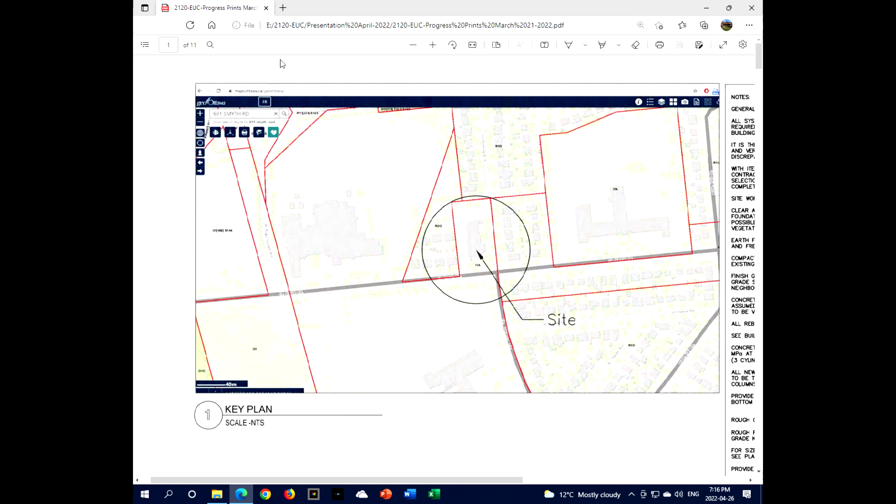I'm not quite sure how. I guess what we'll do is we'll call up a couple of the drawings that I have, and I may jump around in terms of what's on the drawings. Most of the discussion tonight will be regarding the front area. So Russell, if you could bring up, I have a drawing here as well. Let's go to the next, I'll give you a drawing number. If we go to A03, so it'll be the next one after that, I believe. Yeah.

I won't stay very long on this particular drawing. This is a drawing that indicates the demolition in terms of what we're removing. So as you can see, the dotted lines will indicate the doors going into the sanctuary, coming down a little lower, the vestibule doors that you have. We've identified we're going to be taking up temporarily all the pavers out front. They're going to need to do some excavation for those columns. So they'll want to take them out, store them, and then put them back in.

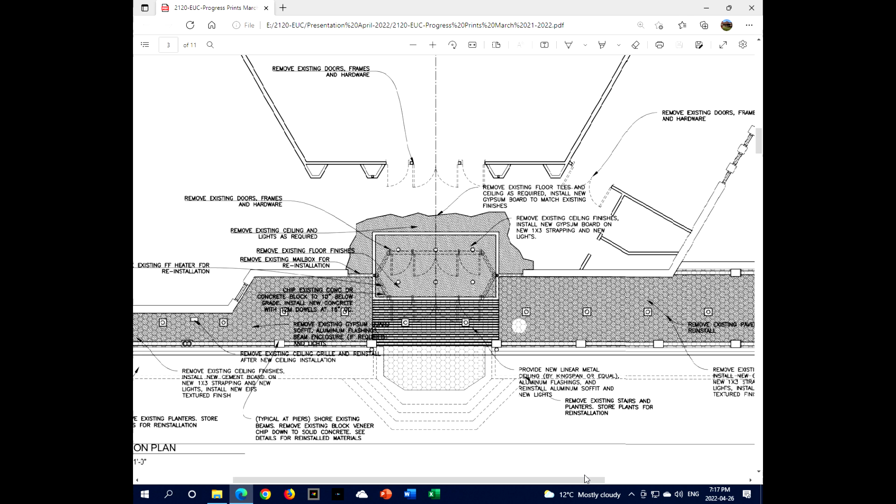And of course, as you can see, the planters will come out and the front stairs. On the left-hand side of that drawing, there will be a new planter reinstated. It'll be out of concrete as well. And then on the right-hand side, you'll see on the next drawing, that will become a barrier-free ramp that will go down to the parking area. So if you want to go to the next drawing. Oh yeah, and as you can see, I've called up what would be removed going outside these doors here.

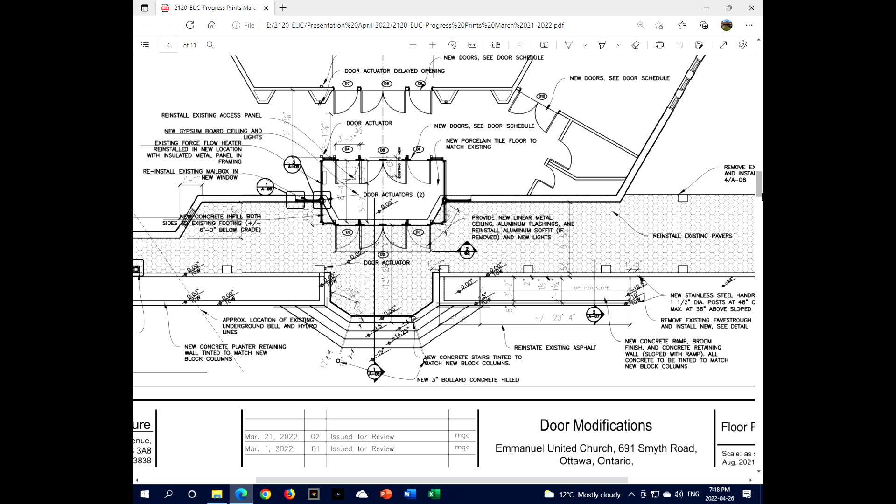So now you'll see all the dotted lines are now solid lines. That's what they're going to be providing or installing as new. The vestibule, you'll notice it is creeping in, and we were just talking about it a little earlier. The interior set of doors are going to have to come in about 24 inches. The reason for that is if you look on the left-hand side of the vestibule, you'll see a dimension there,

the 8'-0". The reason for that is by code, when you have barrier-free doors, when the interior door opens up, you need a minimum dimension in front of that door before you get to the next door. And that is why, in the scenario you have right now, you've got a barrier-free door on the left-hand side on the inside, and a barrier-free door on the right side. You have to do this sort of zigzag going out.

Again, primarily for code reasons, you can see I've squared off the exterior walls there. They're not at a 45-degree angle anymore. The whole vestibule will be a rectangle. You can see the barrier-free ramp on the right-hand side, which will go down to the parking lot area. They'll be reinstating the pavers, putting everything back together.

All the columns will be, a little later on, I won't stay on the drawings too long, but we have details of how they're going to construct the new columns, which will be reinforced concrete block columns.

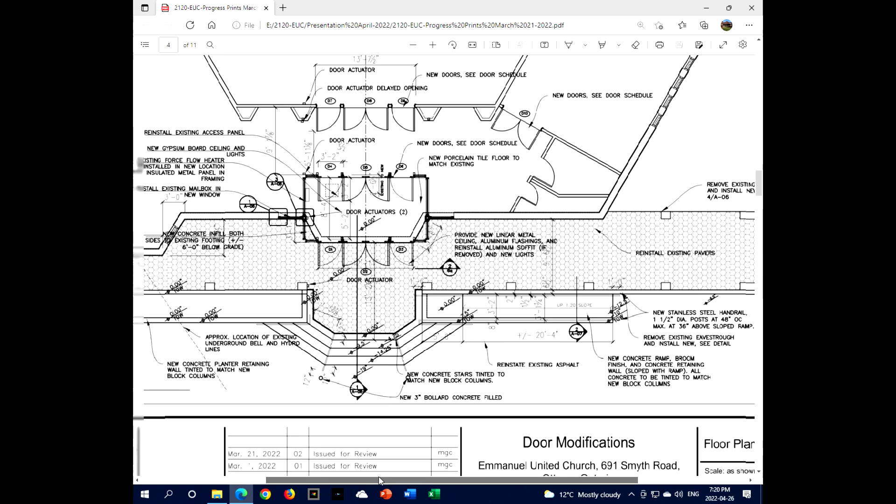If you want to, Russell, if you just want to scroll that drawing up so we can take a look at that area there. I do have, and I'll quickly go through, I do have PDFs and also have hard copies of some of the product data. I have a couple pretty pictures of the actual pavers that I'm proposing in that area. We'll get to that at the end.

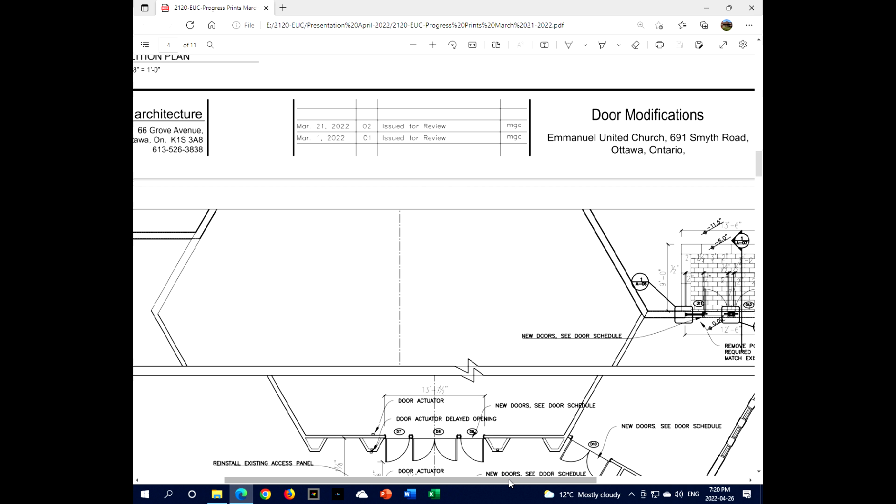But basically, as you can see, it's just a level platform. The grade will come right up to the platform, just clean things off in that area.

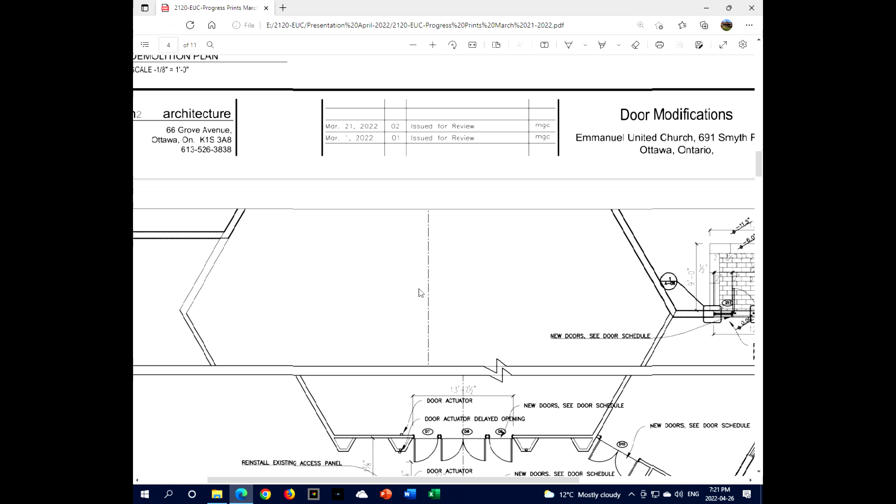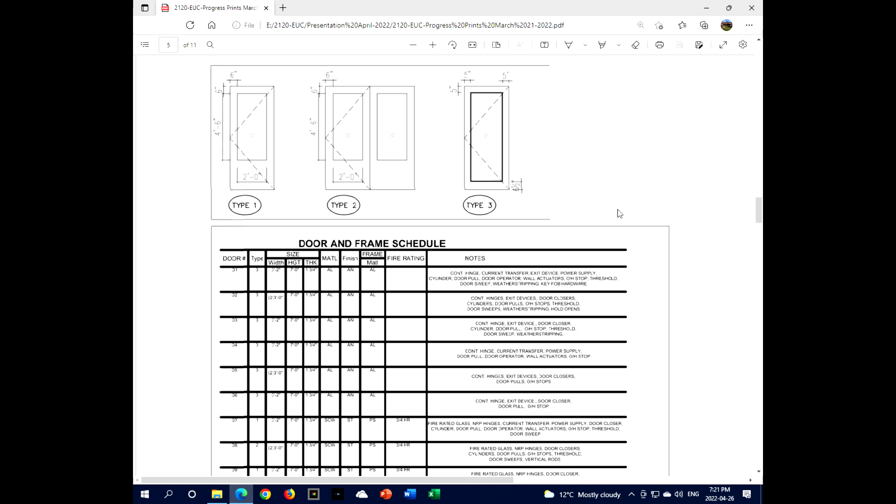Maybe, Russell, if you want to go to the next drawing, and at the top left-hand side, just a couple of pretty pictures. The below part, the door and frame schedule, gets a little technical. It basically talks about the type of hardware that is going to be required. We do have a hardware consultant that's actually going to take that information and put it into the specifications.

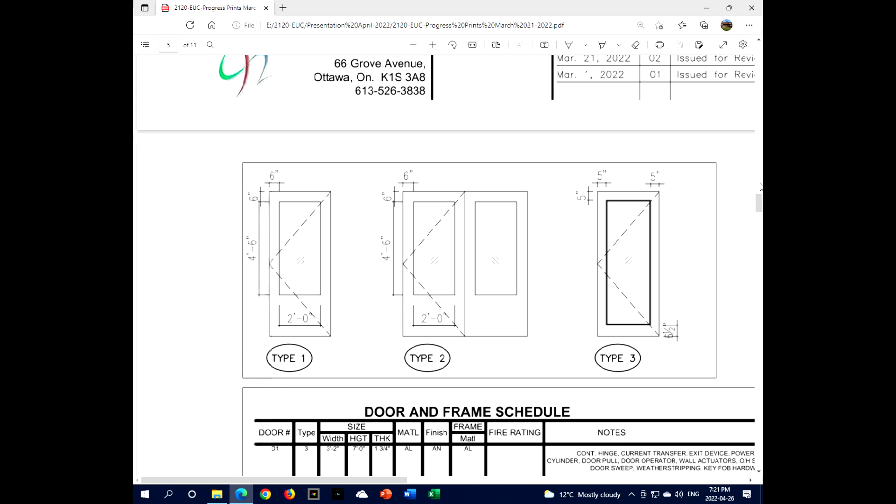On that note, I guess I'll touch on it now. In terms of finishes, we've got a lot of decisions to make on the finish of the doors. The wood doors, I've specified an oak door, which is what you have right now, color to match as much as we can. So the contractor would submit samples and we'd look at it and say, that's close or it's not close.

You'll notice there is a folder there with a bunch of little metal samples. If you look at the one, I think I slid it out a little. It's what we call a 613 finish. It's an antique oil bronze finish. If you look at it, it looks like what you have here.

What is interesting, the actual handle sample, and it all depends on the manufacturer and the process that they use. The actual door handle that I have there is a 613 finish. Doesn't look the same. That's what we used on the Southminster Church renovation.

So it's going to be one of those things where we will specify what we want, but we're going to have to get samples in and make sure, because depending on the manufacturer, they use a different process. That handle there, if you look at it in certain lights, you'd swear it was black. But when you actually have it on a door that's been stained, it is a brown, but it's more of a chocolate brown than the oil bronze.

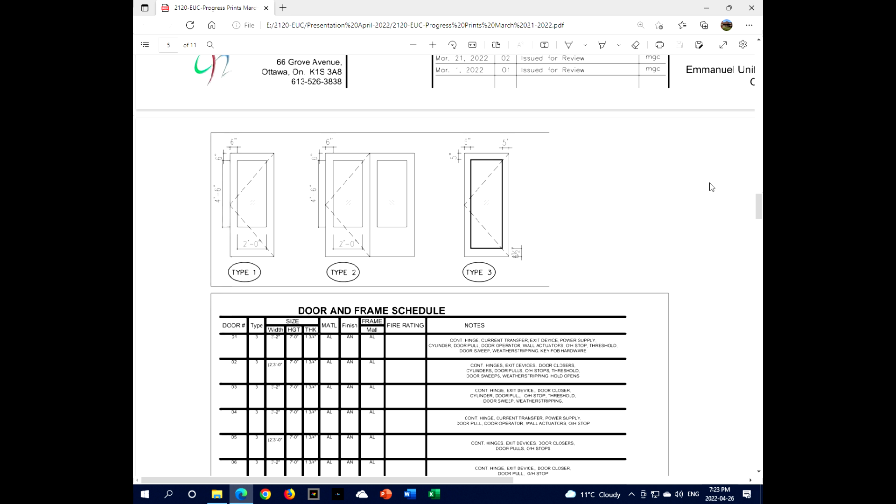Just a quick note so you can visualize what you're going to see. The door type 3, which is the one on the right-hand side, that is basically the vestibule doors that you're going to have. Now you will have, and I do have another catalog cut, I'll go through real quickly on that, a horizontal bar going across. It'll be what we call a panic bar or exit device that goes across.

On the other two doors, type 1 and type 2, those are the wood doors coming into the sanctuary and into the lounge. I spent a lot of time, I made phone calls trying to find a full light glass for you. Problem is these are hour and a half rated doors, and we can get an hour and a half rated door, but there's a limit as to how much glass you can have.

And actually, this is a fire rated ceramic glass, not Georgian wired, so you won't see those little wires in there. But everyone I spoke to so far, that's the maximum. They say so many square inches of glass that you're allowed in there. So it doesn't go right down to the floor, but part of the discussions were, let's open it up, let's try and make it more inviting.

And that's why you see the glazing that you have right now. Now that fire rated glass is available, we can go with a larger piece of glass. 30 years ago, all you could use was Georgian wired glass, and again, they had limits on how much glass you can put based on the fire rating of the door.

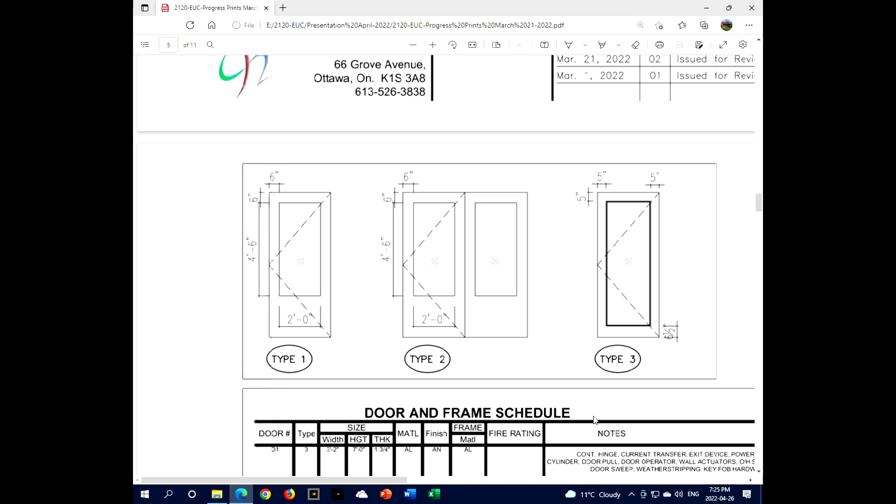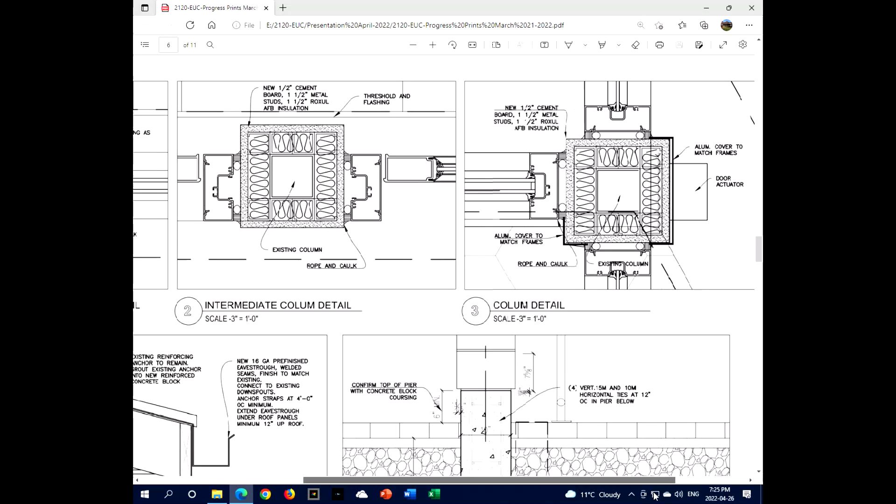Russell, if you just want to scroll to the other drawings, I don't think there's much to necessarily talk about, but as you can see, we've got details on how all the components are going to fit together. Bill had mentioned that you had some issues with your eaves trough over the breezeway, so we've got a detail in there. That detail actually pretty much came from the original drawings that you gave me.

And then if you want to just scroll to the right there. Again, I won't go into the details, but that's essentially the details on how we're going to repair those columns. I think maybe you can scroll to the next drawing, A7.

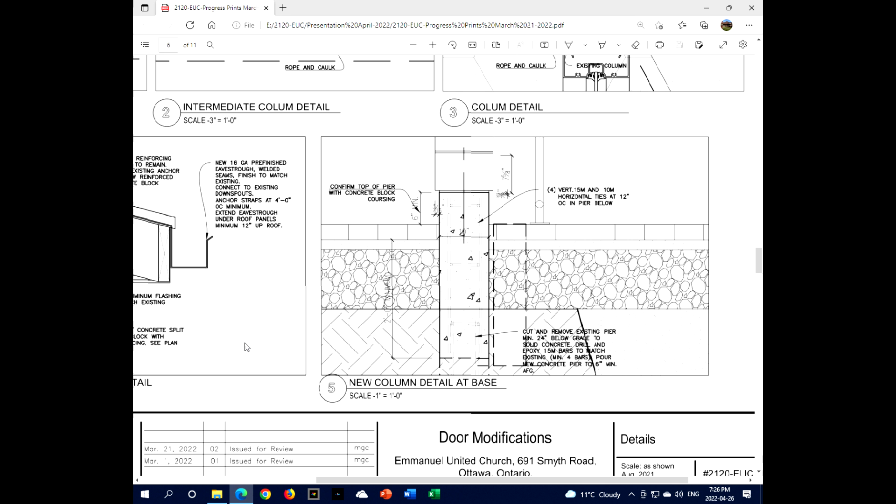And on the left-hand side, that's the section through those doors going outside. And again, I can show you quickly some pretty pictures. So you've got some pavers, you've got a mega block edging around it, and then the grass will come up to it.

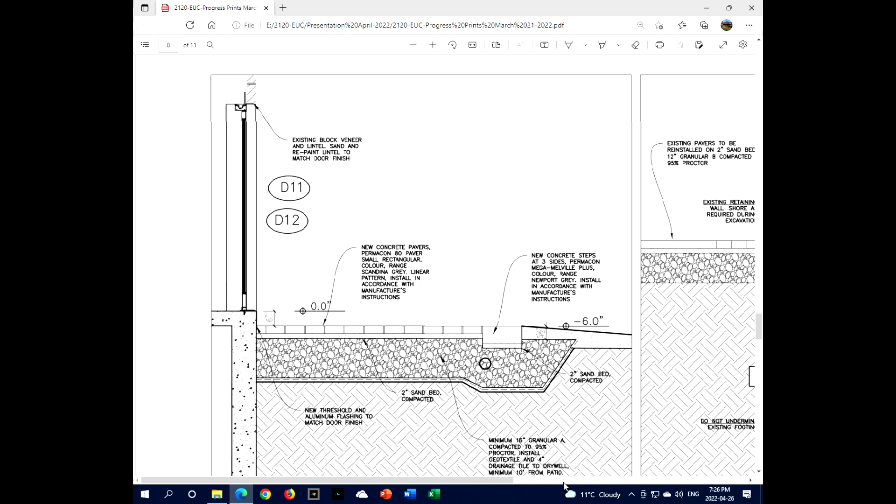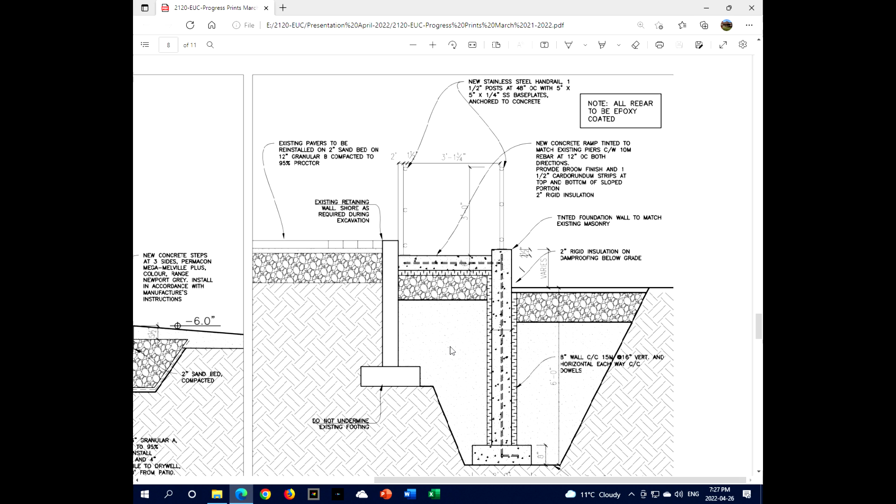And then on the right-hand side, I believe that's a section through your barrier-free ramp that's going down to the... and I think, Russell, maybe the only other one, maybe A09, which is not the next one, but the one after that. That's just a very quick elevation of what things would look like from the parking lot. I didn't get into rendering or coloring or anything like that, but I thought you might appreciate being able to see what it's going to look like.

Are those foundations under the pillars existing now? Yes, they are. There is a little discrepancy on the original drawings. Some of them showed concrete, some of them showed concrete block. What we've called for is to chip down a minimum of 2 feet or to solid material, dowel, and then form from there. We're trying to minimize the amount of excavation under this area.

There's not a lot of information on what is under the concrete that's at the outside of your pavers, just at the edge of the paver. You've got the pavers, you've got concrete, then you've got your planter and a wood planter. We don't know how deep that goes there. So we're going to try and minimize; we don't want to undermine what's there right now. Like any project, once you get out of the ground, you breathe a sigh of relief, because it's the unknowns that you deal with.

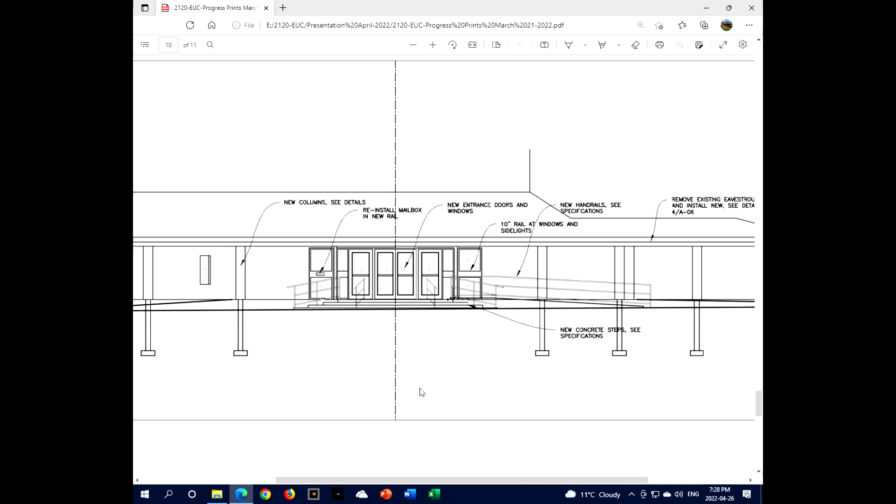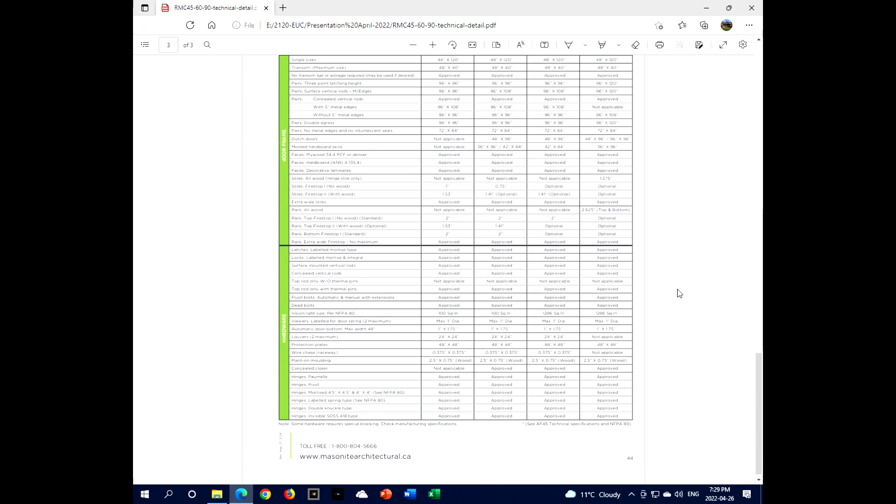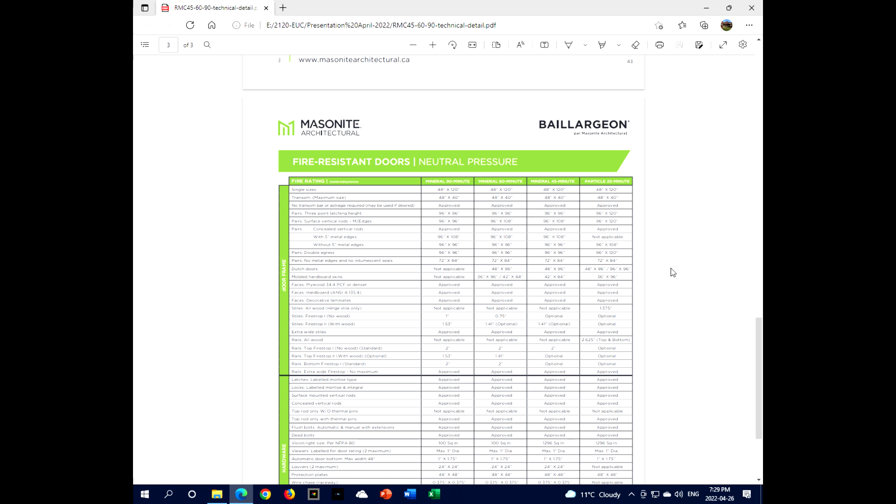Perhaps, Russell, if you want to go back to that file, there's one called, I think it's RMC. We'll just go through those files. Not a lot of information here for you, but they do make 45-minute, 60-minute, 90-minute doors, and then of course the glass. I spoke to them and specified the type of glass and how much glass we can get for your wood doors. So we could go to the next one, Russell. You can just close that file. A lot of that information will be in the specifications that I produce. So close that file and open up one of the other PDFs; we'll just jump around a bit.

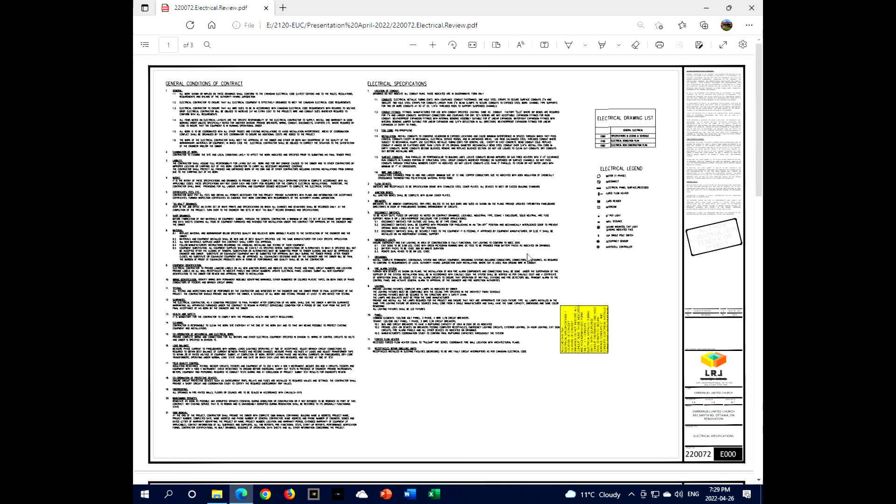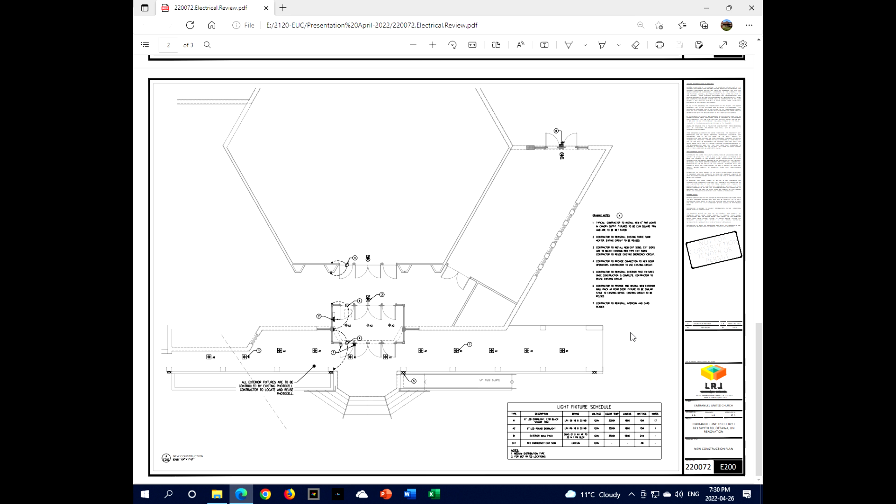I'll quickly go through that. Go to the third drawing. This is on the table. I brought 5 sets; I can print more if you need. There's the architecturals, and then there's electrical drawings. Not a lot of electrical work, but we're obviously going to be replacing the lights in the breezeway. There's 4 lights, they only showed 2, I've already told them, on the outside of the columns that they'll be temporarily removing and then reinstalling.

Everything out there will be reinstalled on your photocell, so they'll come on automatically. We have pot lights inside the vestibule, and the exit lights we're hoping to reinstall. Again, not an awful lot of electrical work on this project. Most of the electrical, which will be picked up as a typical detail, will be all the controls for your doors. You have a doorbell, an intercom system, a key fob system, and you're going to have an actuator, which is handicap buttons. All that has to be tied in, so there'll be a lot of wiring at the doors, but we'll pick all that up.

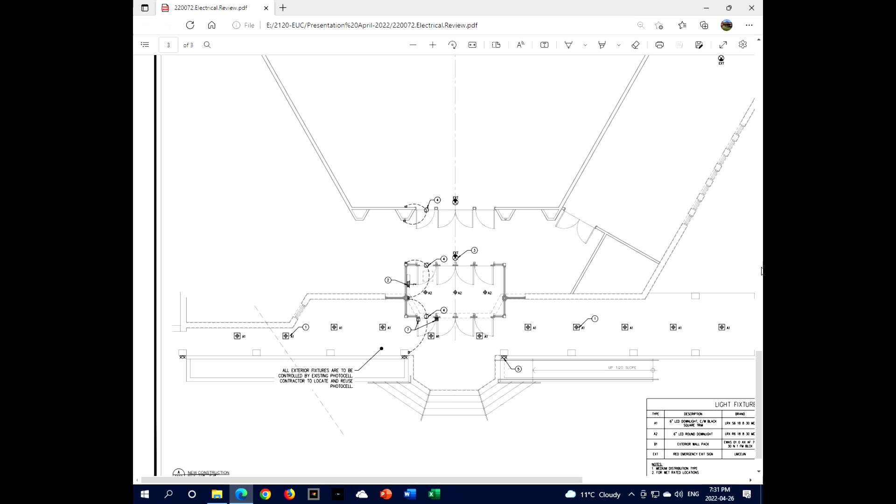So close that PDF and open another one, scroll down to page 6, I believe. You'll see a red bubble. This is your Kawneer aluminum storefront doors. It comes in 3 different stiles: the 190 narrow, 350 medium, and 500 wide. I've specified the 500 wide, which is pretty much what you have out there. It's also a maintenance issue; your doors are a lot stiffer with the wider stiles. But if there's feedback and somebody wants to slim those doors down a bit, we can always change the specification.

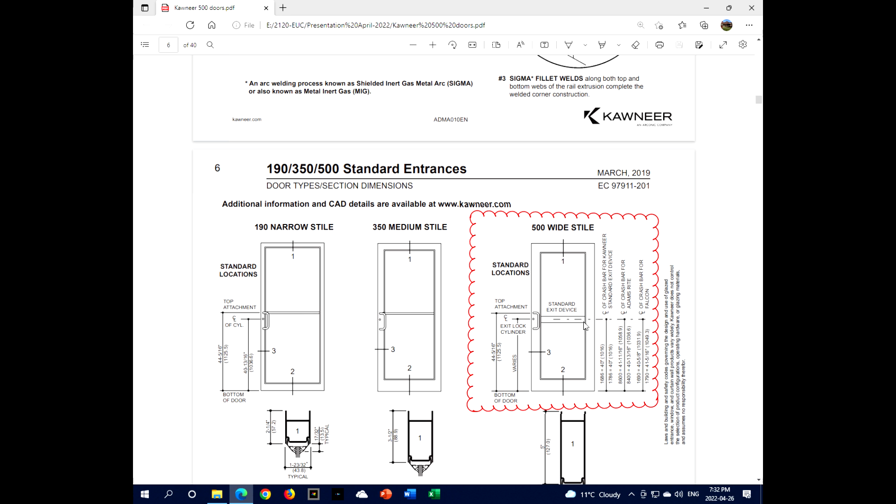And as you see, there will be the impression of a horizontal rail. That elevation shows an exit device. So close that file and open another; you don't have to open the 500T because it's the same.

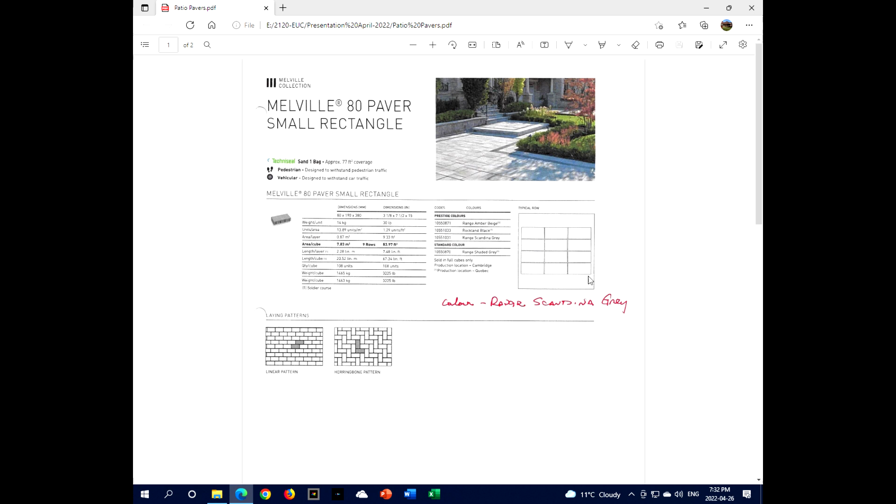The difference between a 500 and a 500T is basically the outer doors are thermally broken. They've got a little gasket to help with your... These are, again, I'm totally open for suggestions if somebody comes up with another product. This is one of those things where in order to show some pretty pictures, I Googled, right? And just to give you an image of what you're looking at.

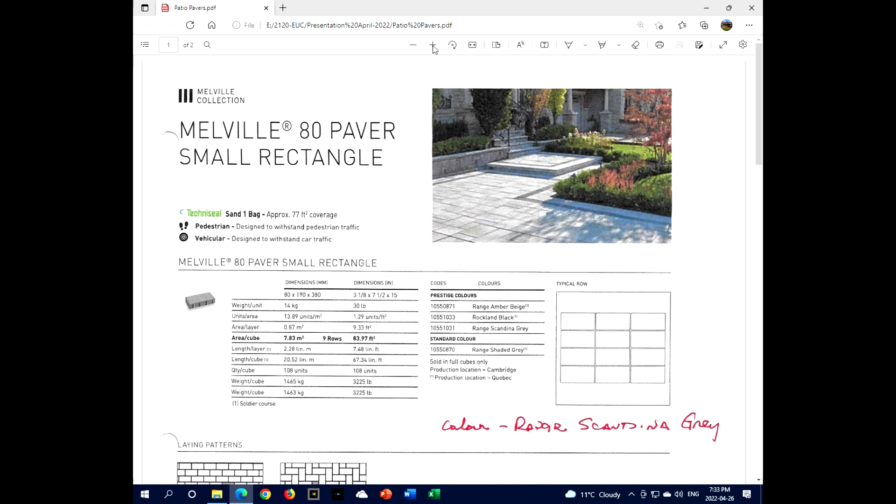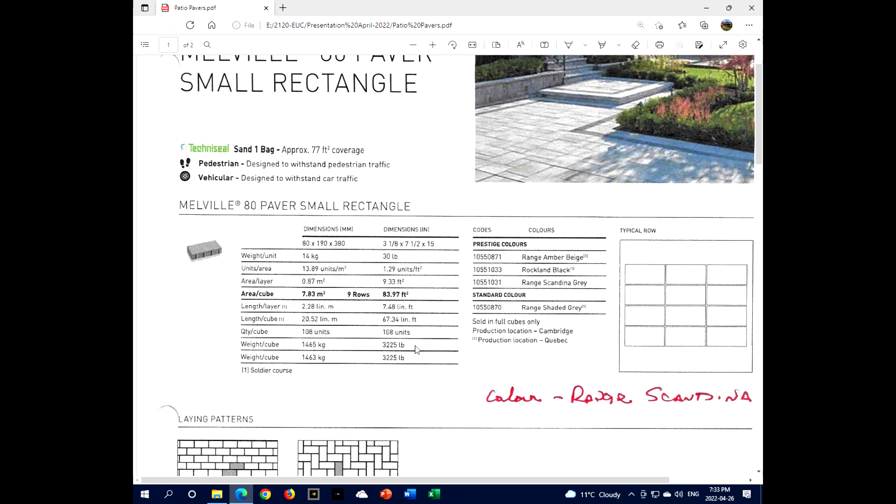But what I've come up with was this Melville paver. They're larger, random sizes, and I have called for, I do have a sample, I didn't bring it with me, but the Scandina Grey paver. And then the next page on that is what they call a mega block. They use it for stairs and edging and stuff. So that would go around the outside, and then pavers on the inside. That would be for that out there. All the pavers here would be reinstalled.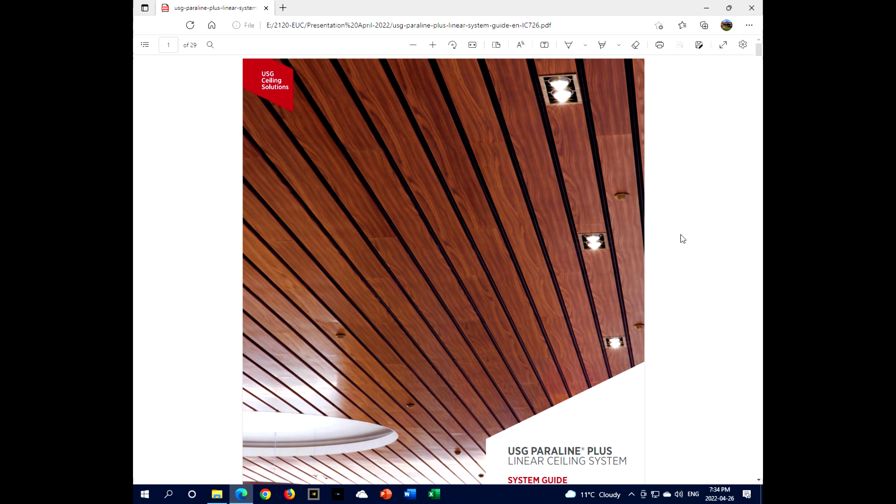So if you want to close that file. So I did bring a sample. This is one of the things that I understand Bill had mentioned that you would like. The ceiling in the breezeway, we're taking it all down. We're going to have to in order to get at the columns and such. We're going to reinstate it, so it'd be a textured finish on either side of the doors, but going out in front of the doors, Bill had mentioned you wanted something that looked similar to what you have in the hall area. I believe that is probably a maple that you have.

We could go with wood. It becomes a bit of a maintenance issue when it's outside. So what I've come up with is a product. It's a metal panel. The sample that I have there, obviously it's not the right finish, and it's wider. You can get a narrow one. I think it's a 4-inch or 3.5-inch piece. What's sitting on top of the sample is a metal sample that I was proposing as a finish. So it does look like your maple. This is actually called beech. So it would be similar.

I put out the other samples if you ended up not wanting to necessarily match what's there and wanted to go with something else. There are different materials there. But that linear metal ceiling would be essentially in front of the main doors only. We could go all the way with it. It's a matter of cost. We bid it this way, and if we've got money to spend, we can ask for a price to extend it. It's about twice the price as the ceilings on the other side.